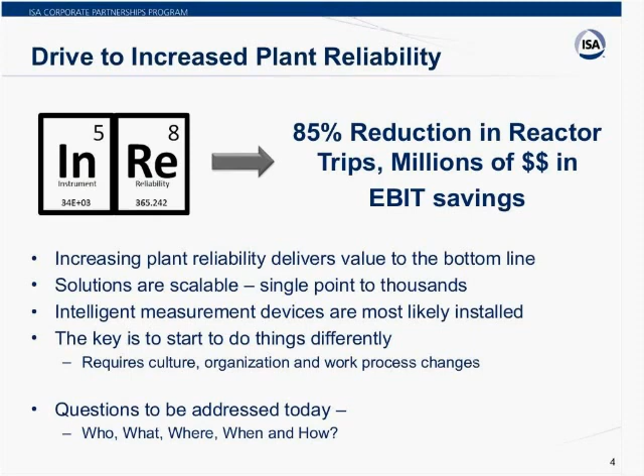This webinar presentation takes a detailed look at what was done, how it was done, who delivered it, and what results were achieved. At the end of this webinar, we will review the who, what, when, where, and how of an instrument reliability program so that you can start on your asset management program as a result of this webinar.

Our speakers today are Shadrach Stevens and Chris Garcia of the Dow Chemical Company. I ask that each will introduce themselves as well as the other team contributors to this successful program that they're about to tell you about. So our first speaker today is Shadrach Stevens. Welcome, Shadrach. Thanks, Chuck. First off, Chris and I would like to say we really appreciate the opportunity to present this case study to the many professionals on the call.

Our goal this afternoon is to showcase the infrastructure and tools that we use to deliver that 85% of savings Chuck mentioned. As you know, reliability is the gift that keeps on giving. And so with that being said, as technical professionals, we have an obligation to really inspire others so that they can also positively influence behaviors within their own work groups. And so throughout my career, I've had the opportunity to work with several Fortune 500 companies, and within our own reliability program, I've pulled together many of the improvement models and tools that we've used to create a comprehensive strategy.

Okay, so first off, I'm Shadrach Stevens. I am an instrument and electrical maintenance group leader for Dow Chemical. I have a bachelor's in electrical engineering and about 11 years experience across multiple industries, and specifically, I have 5 years experience within Dow. And joining me here in a few moments will be Mr. Christopher Garcia. Chris is an I&E technology leader for the Houston area operations. Chris has his associates in instrumentation, and he's pursuing a BS in electrical power engineering technology. Together with Dow and Rohm and Haas, he has 20 years of experience within the discipline.

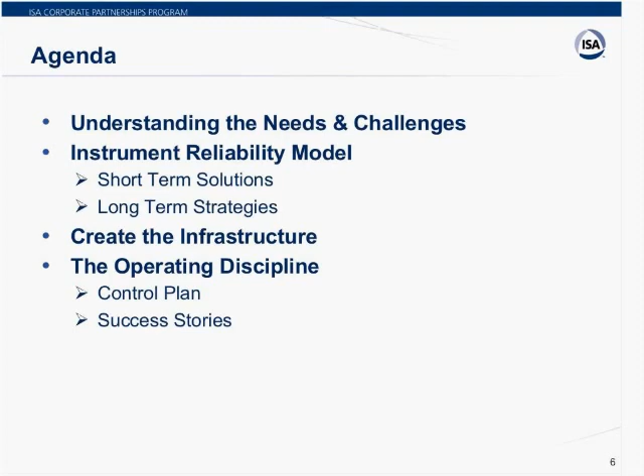So one of the first things I learned as I started my career in engineering is that before you begin any type of improvement strategy, it's always important that you document what the baseline is. And that's mainly to track whether or not your improvements are actually delivering value. And it's even better if you can represent your baseline pictorially. So this was a representation of how we got started back in 2011, and what I call our case for change. This is what our opportunity was regarding instrument reliability.

If you look at the Deer Park facility, we have 67 process units, and within those 67 units, there were 5 units, specifically 5 reactors, that were accounting for almost 50% of the total instrument and control valve equipment failures. And so that means you had millions of dollars in production losses related to only 5 units, 8% of the entire population. And I bring this up because one of the things you want to do as you roll out your own strategies is quickly identify the biggest bang for the buck, right?

You're going to invest resources, time, energy, and money into rolling out a strategy. You always want to have quick results. And so the best way to get that is if you identify what the biggest bang for the buck is. And in our case, which made it actually a little bit easier, those 5 reactors all had similar process technology. So that means the equipment was relatively the same from reactor to reactor. If we were working on an improvement on one train, we could easily leverage that over to the other 4 trains. And so that basically helped us gain some momentum with our leadership as we began to roll out this program.

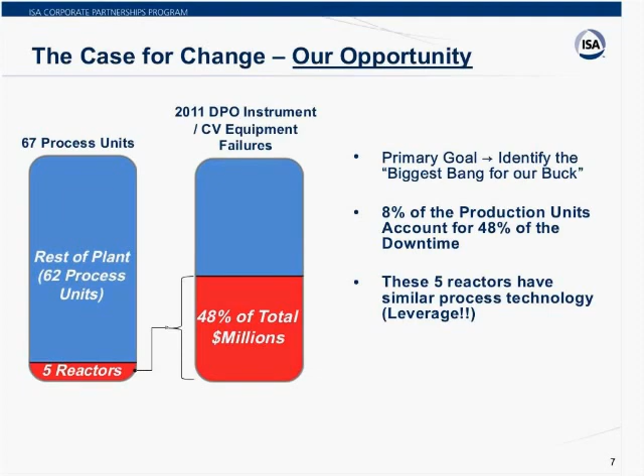But the main thing I want to get across is always document what the baseline looks like so that you can show your leadership, hey, we're tracking towards delivering value. And so just to fast forward a couple of years, if you look at 2011, we started at around 50% of the site's downtime. After 1 year of implementation, we dropped down to 16%, so we made a significant step change with the reliability strategies that we implemented. And then at the end of last year, we got down to single digits in downtime across the site.

And so, as I mentioned, one of the key things is to get that baseline so that as you show progression year over year, you can continue to gain more momentum with your leadership partners. And this slide just validates that we're on the right track with some of our value creation.

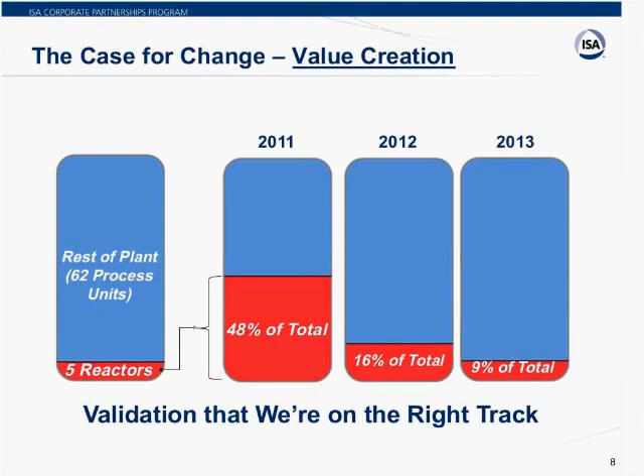Okay, just like I talked about, you want to show the baseline before you begin any improvement strategy. One of the things that we did to get us kick-started was we held what you call a Kaizen event. Before coming to Deer Park, I had some experience working with continuous improvement models, and Kaizen is the Japanese word for continuous improvement. And one of the things that I learned throughout that developmental stage of my career was that it's always key to pull in resources outside of your own natural work group so that you can get a different pair of eyes to see where the challenges are.

And so first off we held this Kaizen event, and we had a couple of brainstorming sessions with the leaders. We asked them a lot of questions about some of the challenges within the facility, but this one specifically stood out, and that was, what are your needs? They came back and said we need reliability strategies and also immediate improvements. And so as an engineer, what that translated to me was we need to stop the bleeding, but then also move to a more reliability-centered culture, right? We need to have more strategic thinking on the way we solve some of these problems. And they gave us a ton of feedback, and you can see some of the examples listed there on the screen.

But there was so much information that we obviously couldn't work on it all within the first year, so we began to really segment common brainstorm ideas. And we had 4 main categories. We had a lot of old or end-of-life instruments. We had lack of PPM strategies, or strategies that were not robust enough. There were a lot of repeat failures.

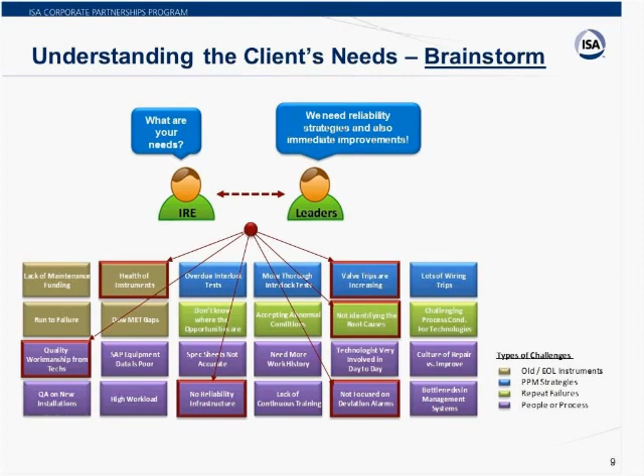And on the screen now, it shows from those sessions, we're able to get a good sense of where the leadership thought our problems were, which is also very key, because when you begin an improvement strategy, if your leadership has bought into it from the early stages, you can continue to push through with that momentum.

It's extremely difficult after you start a new program, a new project, and things maybe aren't working correctly, to try to get the leadership engaged after it's been started. It's very difficult. That's one of the things Chris and I have learned: if we want to make sure that this program is successful, let's get them engaged early on.

So, for example, trip investigations. Every time we had an unplanned event on one of those reactors, we actually conducted formal and informal root cause investigations. And so we had about 52 trips in that first year. And what we're trying to understand is what were the root causes to those unplanned events?

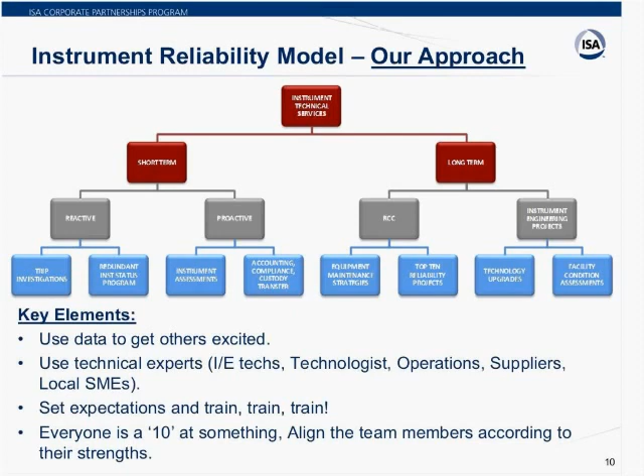So, I'm not going to go through all of the pieces today, but I wanted to give you guys a sense of the overall model that we chose to use in our approach. And some of the key learnings that we had when we developed this was we used the data to get others excited. As I mentioned, we brought in our leadership early on, and we started showing them pictures, started showing them these RCIs, started showing them data that shows we truly have a lot of issues here with our instruments. And working with leadership, you always hear, instruments are acting poorly, we have poor measurements, but no one ever actually sits down and takes the opportunity to share with the leadership what that looks like.

So we'll talk a little bit about how we use the data. I also use the technical experts. As a reliability engineer, I'm only one person, and there's plenty of resources out there within our technicians, technologists, even our suppliers, pulling in resources from outside of the plant to help you solve some of these problems.

Next is set expectations and train. I can't stress this enough, how important it is, before you roll out your own strategies, to make sure you have alignment with the individuals that are going to be responsible for delivering the value, and you got to train them. I mentioned one case where we trained our technician how to do an investigation, and we also trained them how to use the data historian so that they can track their own instruments.

And finally, I want to say everyone is a 10 at something. I heard that statement a long time ago, and I definitely believe in it because every one of the team members has a strength. And your objective as a leader is to try to find what their strengths are and then align them to whatever strategies work out best for what tool sets they have to deliver.

Okay, so let's talk a little bit about the infrastructure and what we call our foundation before we actually put the boots on the ground and start solving problems. This was a snapshot of our original infrastructure. At the very top layer, you have what you call an instrument reliability engineer and also instrument discipline activity specialist. These are the two folks that kind of give the overall vision for the facility. And the second tier is what we call our instrument focal points. These are the technologists within each of the plant areas that help execute some of those strategies or that vision.

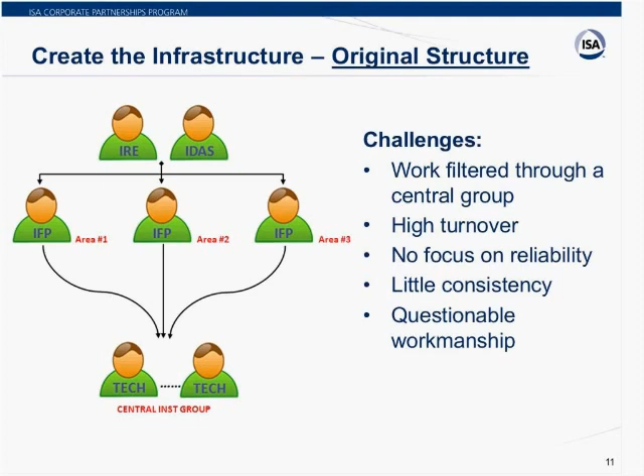So we went to the leadership team and we proposed a new structure. Now, I know it looks like there's more people added on the slide, but we actually didn't add a ton of people. What we did is realign some of the folks we had within our areas. And so at the top layer, we still had the engineer and the IDAS. What we did do is infuse the group with a team of special project technicians, and those folks were only to work on reliability projects.

They were not bogged down with the day-to-day efforts within the plant. The next tier still kept it the same with the focal points, but what we did do is take some of the I&E technicians and promote them up into what we call a reliability technician. And so those roles were concentrated half of their time in the plant solving problems and the other half of the time working on reliability strategies.

So the instrument focal points had a resource of someone that could spend more time in the plant helping them deliver their strategies. And then on the bottom layer, we actually segmented technicians to be responsible for certain areas. And so with that, we're able to control a little bit better the workmanship. Also, we can train folks depending upon the technology that exists within those facilities. And it helped us to really set expectations.

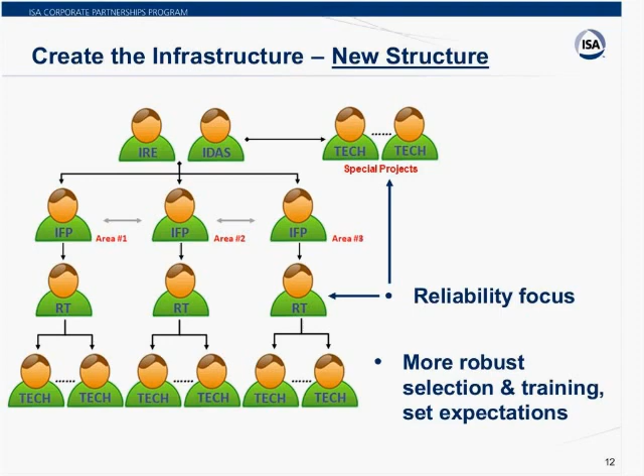We said, okay, we've got a handful of techs that are going to work in Area 1. If something fails, you are responsible for creating the solution for that. Okay. And so we had the infrastructure. We worked with leadership to really define or get approvals to adjust the people within the infrastructure. And with that, at the same time, Chris and I were working in tandem, creating an overall strategy document.

And it was about like a 50-page document that says exactly what we would do at each step of the process. This was basically our approval document for the leadership so that they can say, okay, we agree that this will be the strategy moving forward for instrument reliability. The key items within that document was we created a work process for every single service. So, for example, how to do an investigation.

We got a who, what, when, where, and how, each of those sequential steps on how to progress through solving that problem. And so this is some of the things that we use to train our technicians and also to keep consistency within all of the plant areas. Thirdly, we created procedures. So an example is for our instrument assessments.

You got different skill sets of technicians throughout the plant, but in order to drive the consistency on how we assess an installation, we had a sequential procedure that said, okay, you're going to do a visual assessment, you're going to look for these things. If it's in this condition, you're going to mark it up with a score. And so at the end of the project, we're able to score all of our installations.

And then the fourth item was investigation reports. These were the documents that we forward along to the leadership every time we solved a problem. And what this did for us is it continued the momentum and the buy-in because the leadership saw that we were actively engaged in finding these root causes. We're documenting what we found, even created action registers to be able to solve some of these problems.

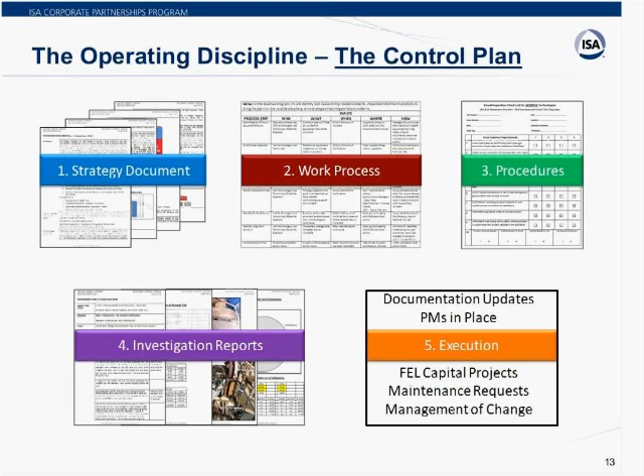And we're going to show you guys in a little bit some of the data. The guys that are still maintaining this program are actually doing much better now than when we were here. Okay? And that's because we took the time to create the program and document it so that now we're in different positions in our career, the folks are still driving the process, using the procedures, and doing the reporting.

Okay, so the next few slides are going to be more about the case studies or the examples that we use to solve some of the problems. As I mentioned earlier, we had kind of an operating discipline challenge with control valves, and as we Pareto the data from year to year, we found out that control valves was one of our biggest bad actors in terms of reactor trips. And so if you look at the data on the slide, for a 3-year period, we saw an uptick in reactor trips.

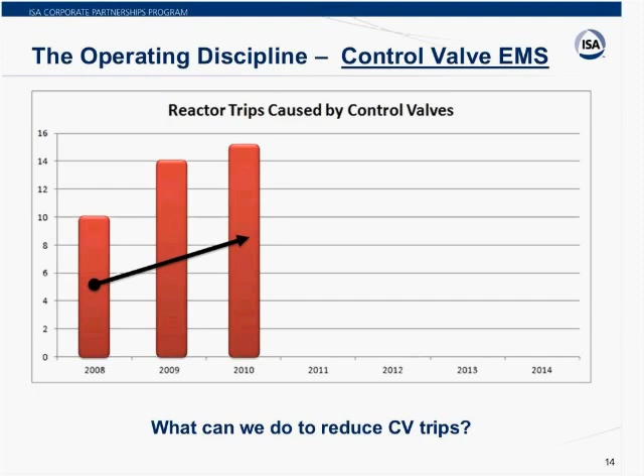And we started to ask ourselves, what could we do to really swing the pendulum the other way? Okay, so we said, obviously, with control valves, the best thing to do is to do some type of maintenance and repair. Okay, so in the first year, we actually started to do that. And we have 5 main categories that we focused on for that first year. We did a criticality ranking on all of our control valve installations. We worked with the production engineers to define which valves are actually critical or that could cause a reactor to trip offline.

Secondly, we created PPM strategies. And so in years past, we had some preventative maintenance plans in play. What we did differently here was we put it in our CMMS so that it could automatically generate work orders so that we can perform these PMs. Next, we created a spare part strategy for those critical valves because our turnaround windows are from 3 to 6 years. And so what if we have an incident in between time? Do we have spare parts or spare control valves so that we could get the plant started back up?

We also created procedures. Well, I can say not most, but 100% of our valve work is done at a third-party facility. So it's done off-site. And so how could we drive consistency with our repair vendors? And we decided we'd create a procedure. We will give the vendors an expectation of all of the control valve repairs so that we could get work done and executed within the same consistency. And finally, we validated design conditions. So we looked at individual installations and saw that, hey, per the process criteria, this valve is not designed properly.

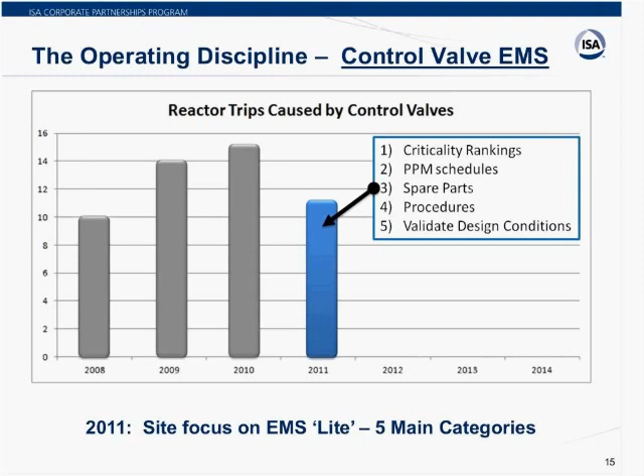Okay, so we did that in the first year. We started to see a downward trend in our valve trips. The next year, we actually started to see a huge step change in the valve trips. And one of the things we did now was we actually created this document, this equipment maintenance strategy, and we started to actually implement it across all of the trains. So the first year, we was kind of manually pulling valves, getting them repaired, but we said this is no way to sustain this program, so we're going to document our strategy, put the PPMs in play, put the spare parts, get them ordered, put them in a warehouse.

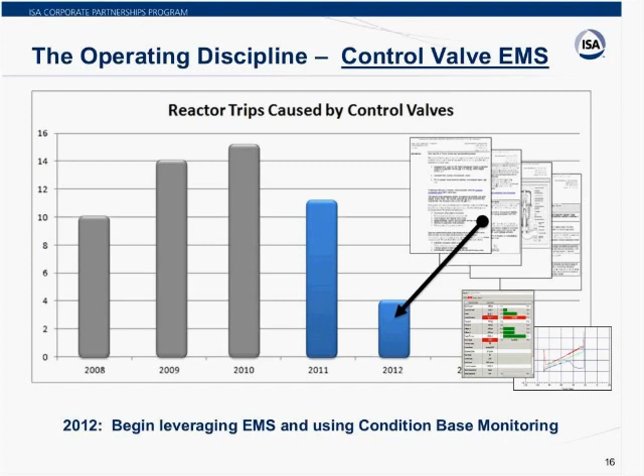And then we also took into account, we had an asset management software where we could start monitoring our digital positioners on control valves. And that really changed the game for us because now with using that hard data, that hard information, we could predict when a valve is going to fail by using the performance curves on the equipment to be able to tell whether or not a valve had a problem, or to set up alerts and alarms, which are a little bit different from what you see in a DCS. And so that made our biggest step change as we started using this condition-based monitoring or maintenance strategy.

So we kind of talked about some of the success stories, and on the flip side, got to talk about some of the bad stuff as well. As we began to roll out the strategy, 4 out of the 5 trains, we were able to implement it. One train was still lagging behind because of business conditions. They actually extended the turnaround until the next year. Okay, that was the one train for 2013 that had the most trips. And we actually went back to the leadership and said, look, we have a good program, we're rolling out, we're seeing some success, but this one train is the bad actor now. And we have the data now to show why it's impacting our strategy.

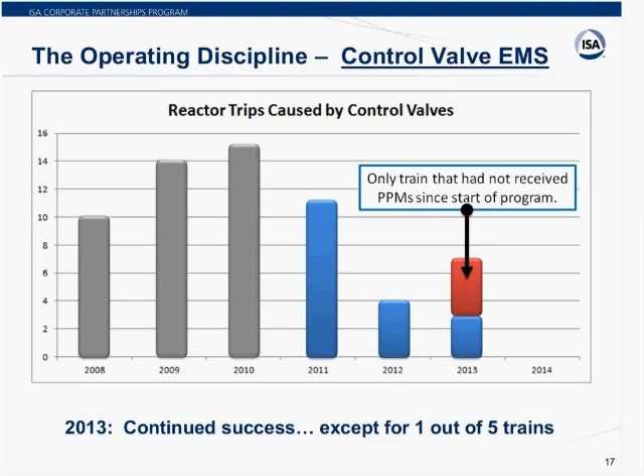So within that next year, we were able to get that EMS implemented for that one particular train. And if you look at this year so far, we've only had one reactor trip. Going back in time and looking at our 3-year trend, as things were going upwards, now we've swung that the opposite direction.

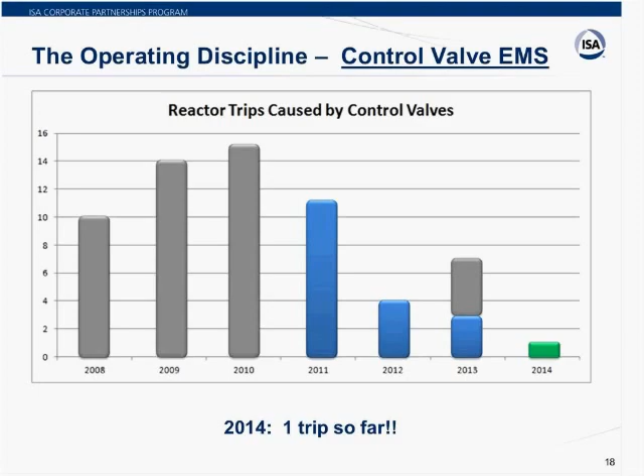Okay, so a couple examples of using diagnostics with control valves. This was an installation that we had on our governor control valve. And so the governor valve is pretty critical for our reactor train because we're using it to control the airflow and the steam flow going into the reactor. And without getting any DCS alarms, we noticed that with our asset management tool, we got travel deviation alarms. And you can kind of see in the graphic there where we set up a triggered profile that would actually give us an alert every time we had excessive travel deviation.

Okay, and so with this particular valve, we went out in the plant and said, oh yeah, we got to perform some maintenance on a positioner with this valve. But our operations partners did not want to give the valve to us to work on it because in order to work on that valve, you got to take it out of service, which in turn shuts down the process.

And so we continued to push the topic, and they said, you know what? We talked to our commercial folks and the business team, and we actually have enough inventory saved up to where we can reduce rates. Okay, we'll keep the valve running at a reduced rate, and then we'll take a planned outage and make the necessary repairs.

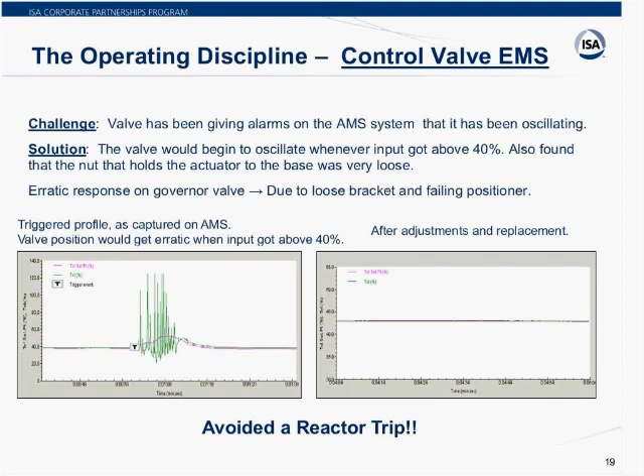So a few weeks later, the plant came down for a planned outage, and we were able to get in there and actually found out that it was a loose bracket and the positioner began to fail. So we made the changes, and now the valve is working great. But we did this all without taking an unplanned event.

And then the last piece I want to talk about is we were using control valve EMS strategies and condition-based monitoring to stop trips, to stop unplanned events. We also use the information to help us reduce maintenance costs. And so we had a situation last year where we were getting ready for execution of the turnaround, and the business came back and said, we really want to reduce some of the job scopes for budget constraints.

And so, as we always do, we perform performance curves on each one of our critical valves. And so we went through that exercise and actually found out almost about 36% of the valves could be removed from the scope of the turnaround because they had no problems with them. Okay, and the graphic here shows one example.

This valve was on the list to be overhauled, and we performed our scans and found out it was like a couple $100 travel sensor. So instead of looking at spending about $10,000 or so for this particular valve, we spent a couple $100 and was able to keep it in line without taking it out for service. And so we did that across our 42 valves, and we were able to get almost $127,000 in cost avoidance.

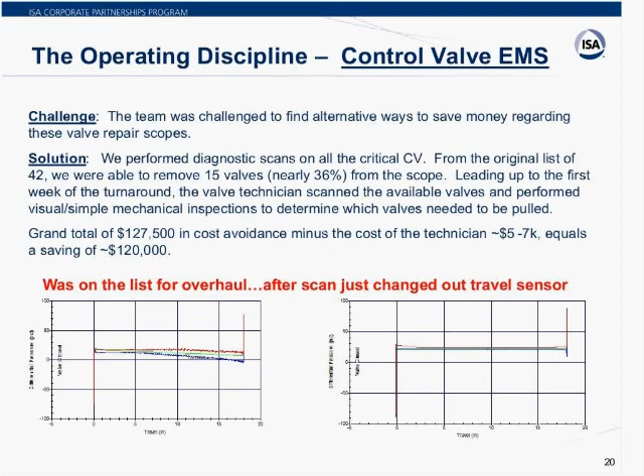Okay, so next up is Chris, and Chris is going to talk to a couple of other case studies. Okay, thank you, Shadrick. Well, as Shadrick mentioned, the leadership in our business, customers came to us and asked for help, and I pretty much said, hey, where can we start? How can we stop the bleeding?

So some of the things we did was we started with assessments and engaged our reliability focus group, the special projects group, in identifying the deficiencies. So to help with those assessments, we created visual inspection checklists for the different technologies, as Shadrick mentioned earlier. That way you can keep consistency in data collection and assessing.

So once collected, the data was downloaded into a database so we can help manage the deficiency categories and repair priorities. So using that database, you can then determine what can be corrected or fixed with or without a work order. So of the 10,000 assessments, we did find 2,400 deficiencies, and then ultimately we did find 400 deficiencies that required a work order to fix it.

So I just want to briefly focus on the pictures a little bit, starting with the top left-hand one. These are some of the deficiencies that we did find, so probably pretty common. A lot of y'all have probably seen the same type of issues, but the top left-hand corner, that's a vent plug missing on top of a control valve actuator, and you can see there's water dripping directly over the actuator, so that could greatly reduce the end of life or the instrument's functionality.

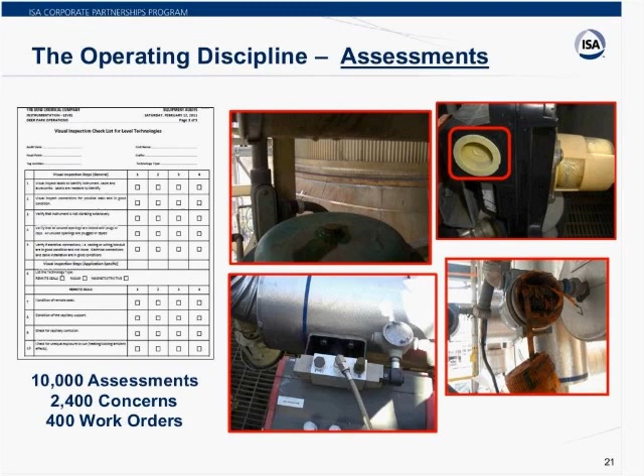Another way to monitor the health of your instruments is what we did. We actually used a tool or software that we already had, our data historian, to collect data. So with the assistance from the operations group, process automation group, and our tech center associates, we created an online monitoring system for the 5 units using our data historian software.

So what we did, we just created a simple dashboard. That way you can see the status of your redundant instruments, and it's real easy to see. So you have green, yellow, red. Green is good. Yellow is, hey, there's something wrong, but it doesn't require immediate attention. And red is, hey, there's something wrong between the redundant instruments.

Let's go and investigate. And the ops and the process automation group helped us identify which critical redundant instruments to put on this software and helped set the alarm limits. And I tell you what, this was a key contributor in helping us with our investigation processes, helping us solve problems and leverage to the other units if needed.

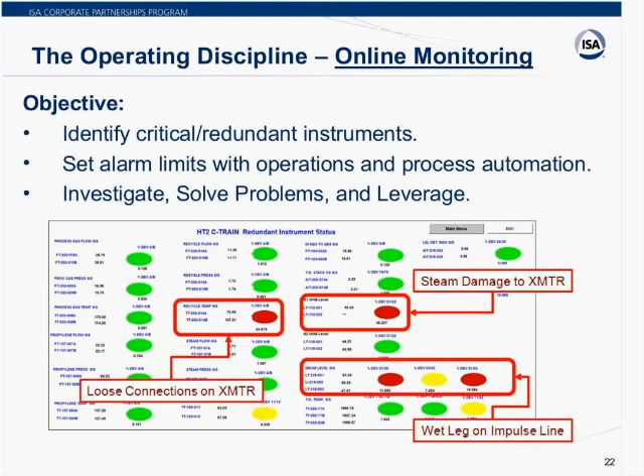There were 2 technologies on our top opportunity list that had a huge impact on our business and big repeat failures. Over a 2-year period, these technologies accounted for multi-million dollars of production losses. So our group got together and said, hey, let's find a technology that's new or make improvements to our existing technology. That way we can improve our reliability and down the road it doesn't require much maintenance intervention.

So after thorough research and data collection, we identified that the 2 top opportunities were temperatures in incinerators and levels in boilers. For the boilers, a guided wave radar would be the best selection. And for the incinerator temperatures, we would improve the metallurgy and the sheath thickness.

Our reason for going with the guided wave radar on the boilers was you did not have to worry about a whole lot of ancillary equipment affecting the performance of your level measurement. Sometimes you can have issues like heat tracing, tubing leaks, or loss of fill that greatly affect your measurements. And for the temperatures, we kept the same technology, but just upgraded the metallurgy and the sheath thickness.

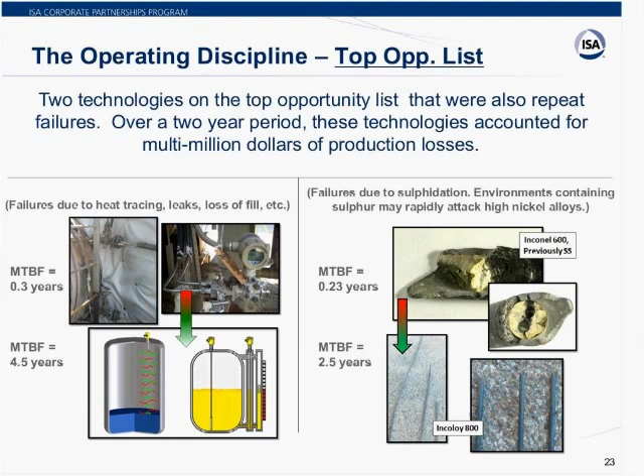Okay. I'm going to turn it back to Shadrick.

All right, so the audience has had a chance to see a few of the case studies from when we rolled out our reliability program. I shared earlier that we're going to progress through the years of implementation. At our baseline, before we rolled out these strategies, we were averaging around 50 trips per year. Within the first year of implementation, we got down to, I think, 26 trips. And every year since, we continue to drive improvements across all 5 trains.

Year to date, we're at a 94% reduction. We only have, I think, 3 trips this year, which is a tremendous improvement over what our baseline looked like. With the way we rolled out the program and got leadership engaged, we're able to continue to drive the momentum delivering this value, or even ask for more resources and more capital money to continue these improvements. So overall, a major success across the board.

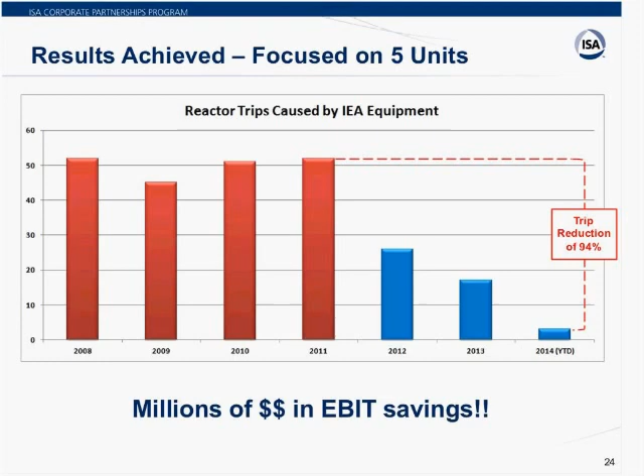And as I mentioned earlier, Chris and I aren't even in the plant anymore, and the technicians are still driving towards understanding the root causes of the problems, coming up with short-term solutions, and then getting to a position where we can implement long-term strategies.

To wrap up our discussion this afternoon, as a result of those strategies and our implementation team, our group of technicians, engineers, and technologists was selected to win the HART Plant of the Year earlier this year, mainly because we were using diagnostics information from smart devices to be more proactive and save maintenance costs on those 5 reactors. Our team was presented this award earlier this year, another great testament to not just Chris and I, but an entire group of folks that worked on this project.

So with that being said, I'm going to turn it back over to Chuck.